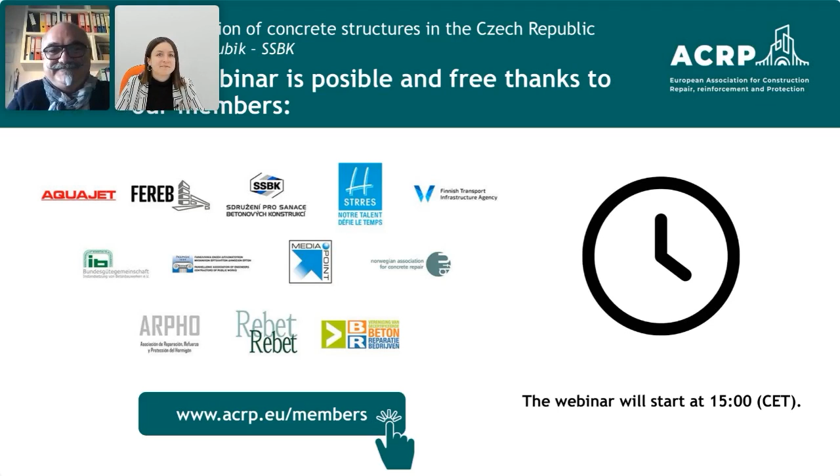Good afternoon to all members, to our participants, and welcome to our webinar. Let me introduce myself. My name is Ales Jakubik, and I am responsible for this online presentation. A little about me: I am the president of SSBK and the vice president of ACRP. I am the owner of a company engaged in research, development, and production of special materials.

I have been dealing with repairs of concrete structures for over 30 years. I work very closely with the Faculty of Civil Engineering of the Technical University in Brno and with other research institutes and companies in the Czech Republic.

Let me also introduce my colleagues who are speaking today on this webinar. One is my colleague Martin Luňáček, and the other is Ms. Karolina, Master of Science, who works as a research and development specialist at the Department of Material Engineering at the Faculty of Civil Engineering in Brno. She specializes in material solutions, repairs, and reinforcements for water management facilities.

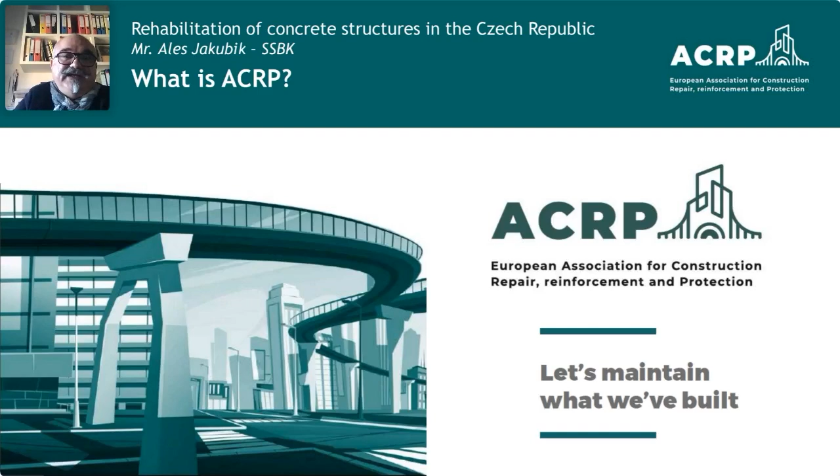The first slide is about our ACRP, the European Association for Construction Repair, Reinforcement and Protection. It's a European non-profit association founded in 2020. Our mission is to promote the maintenance of constructions and its applications in Europe towards the highest professional integrity and quality of service, repair, reinforcement, and protection techniques, and to promote the maintenance of structures and buildings. To achieve this mission, ACRP works to create a European network of professionals working together to develop and share best practices, regulations, and training.

The history: the initial idea was born in discussions between the French Association STRRES and the Spanish Association ARPHO in 2018. In March 2019, representatives of 6 European countries met in Paris to share experience and shape the initiative for a new European association. The European Association ACRP was founded in 2020.

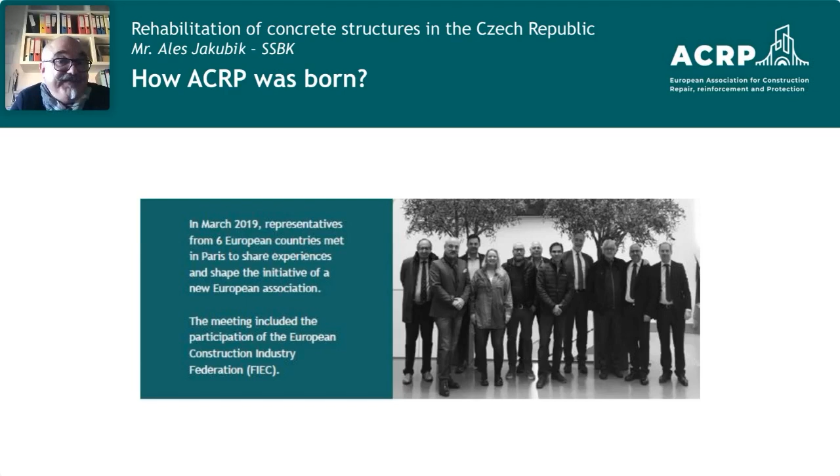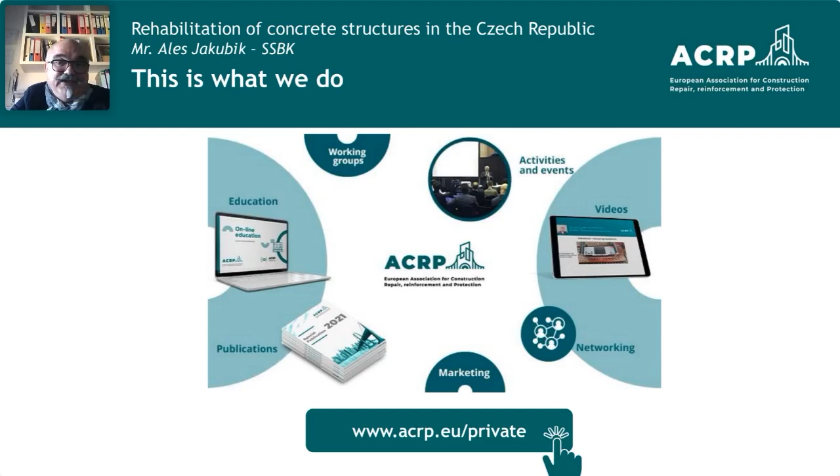ACRP currently brings together national associations across Europe. Our active members are colleagues from Belgium, Czech Republic, France, Finland, Germany, Greece, Italy, Norway, Spain, Sweden, and the Netherlands. ACRP is an open association, and we are constantly expanding our member base. We will be happy to welcome new members, so do not hesitate to contact us.

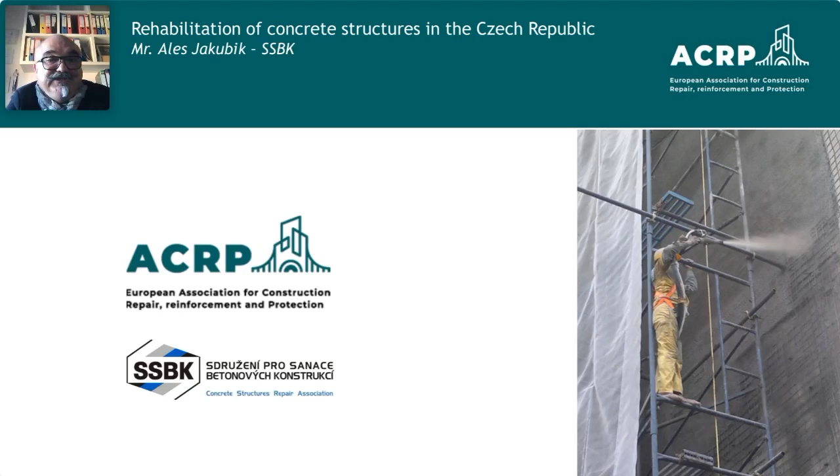Introduction to the webinar: one of our goals is to focus on educating and passing on the latest knowledge and experience. A set of webinars that we are constantly preparing for you is one of our important activities. Today, we have prepared another new webinar on the topic of technology of concrete repair, experience, and knowledge from the Czech Republic.

As Paul Stuem, our colleague from Norway, said, repairing the structure is not a problem, it is an integral part of the construction life cycle. I am applauding this statement. Each of us will proudly sign this definition.

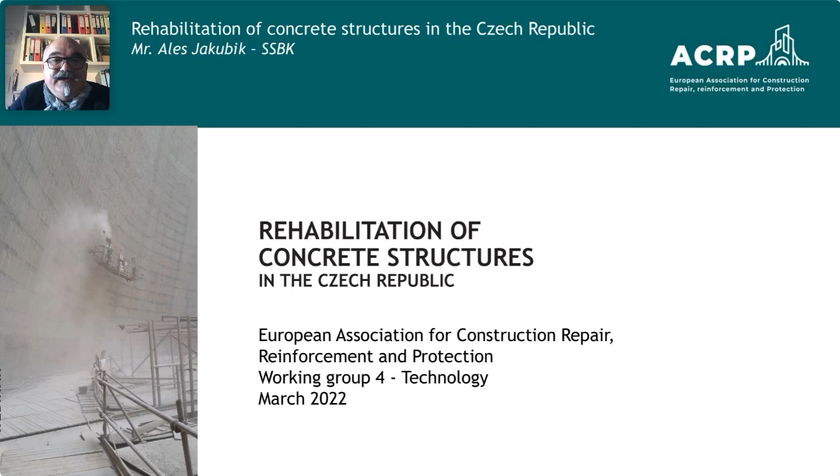The content of our webinar is divided into 5 parts. First is the introduction. The second is Working Group 4, technologies of the industry working group. The third is technical conditions for rehabilitation of concrete structures in the Czech Republic. Part 4 is examples and applications in selected implementations in the Czech Republic. And last, questions and comments from you, our participants.

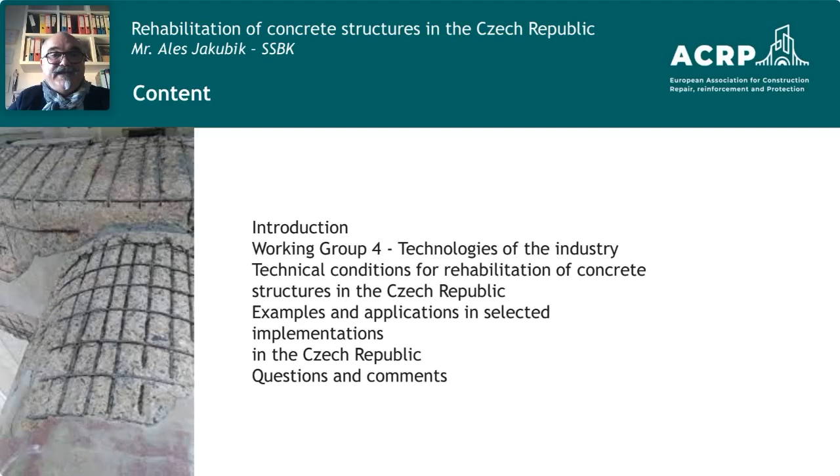Now let me talk about the abbreviation SSBK. It's one of the founding members of the ACRP. SSBK stands for the Czech name Association for Rehabilitation of Concrete Structures, and it was founded in 1992 in the Czech Republic.

SSBK deals with securing and protecting common interests in the field of rehabilitation of concrete structures. SSBK ensures the exchange of information, cooperates in areas of standardization, development of technical and technological solutions, professional advice, and professional education.

Close cooperation with many Czech technical universities. The 3 largest of them are permanent members of the SSBK. There is also close cooperation with a number of domestic associations and scientific companies.

Now about Working Group 4. The Working Group Technology deals with securing and protecting the common interests of ACRP members in the field of concrete structure repair and reinforcement technology, especially regarding technical information, development and plan creation, coordination in standardization, coordination in technical development, and coordination of consulting services. It prepares and shares experiences and knowledge among all ACRP members.

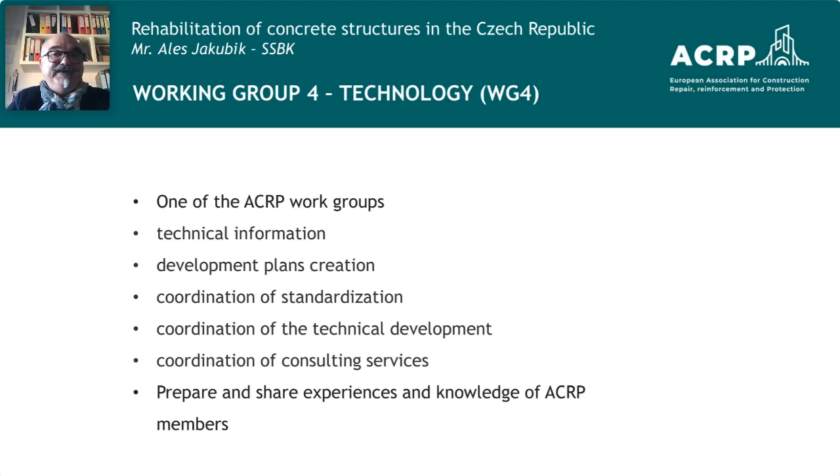Our goals are simple. The first goal we set for ourselves is the creation of a joint manual technology of concrete structure rehabilitation. We want to combine all current knowledge from the individual national associations to create one common, simple document.

This document should form a set of basic common rules which will follow the current European standards in the field of concrete structure rehabilitation.

Our work is based on the experience and governing documents of national associations. How can you join? Each member of the ACRP can participate in the work of this working group. Experts from all fields of remediation for concrete structures are welcome, such as designers, diagnostic specialists, technological and material engineers, or specialists in the execution and control of work.

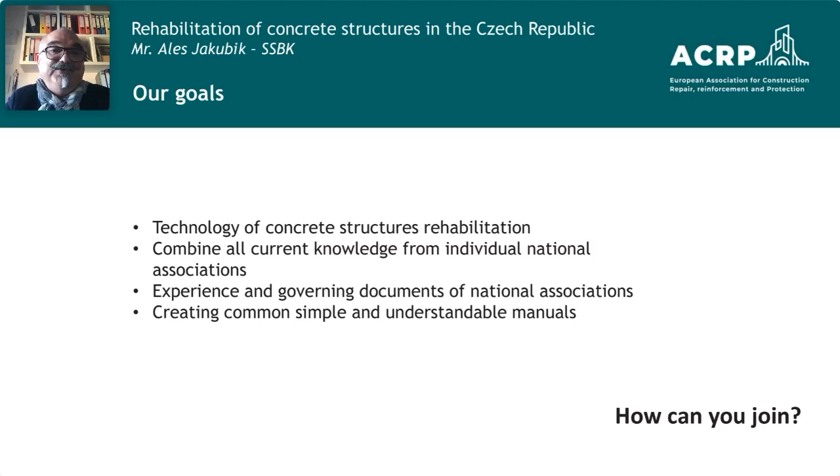The working group works closely with academics at universities and research institutes. Being part of this group also means promoting discussion and collective work on basic guidelines related to standardization and recommendations for the future development of these activities.

Now we move to the topic of this webinar: repair of concrete structures in Czech Republic. Our procedures, our technology steps, our manuals.

The webinar is focused on the area of concrete structure rehabilitation, especially the part that deals with design, technology, material solution, and implementation of this method of building maintenance. We will draw on our own experience and cooperation within the working group.

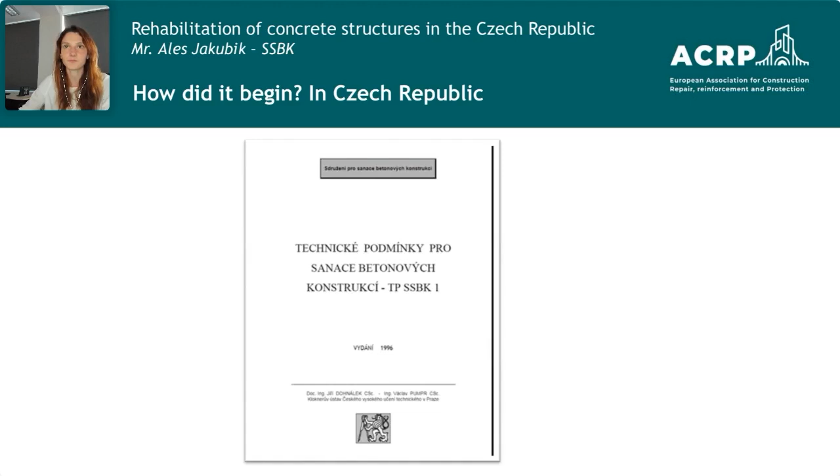It predates the EN 1504 standards; the handbook drew on national standards which it supplemented and expanded. The first edition defined initial recommendations and values like methods of diagnostics, use of tests, methods of evaluation, technological procedures, and recommendations. The basic document had only 60 pages.

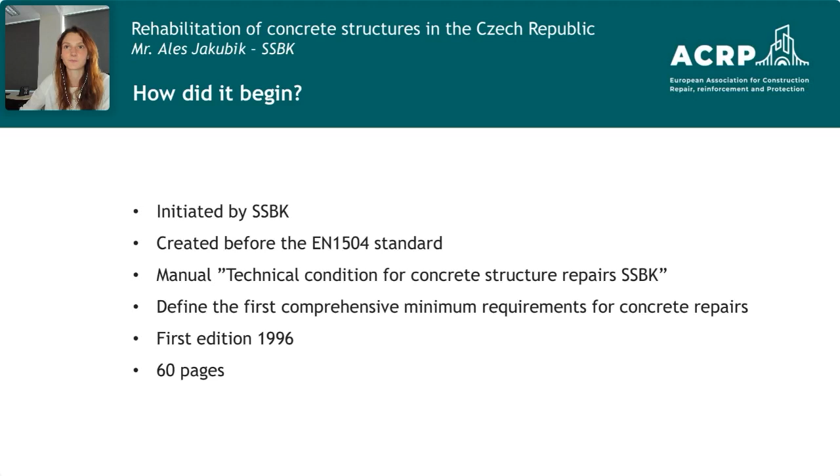This first edition is focused mainly on two areas. First is execution and control of works, and the second is about testing procedures.

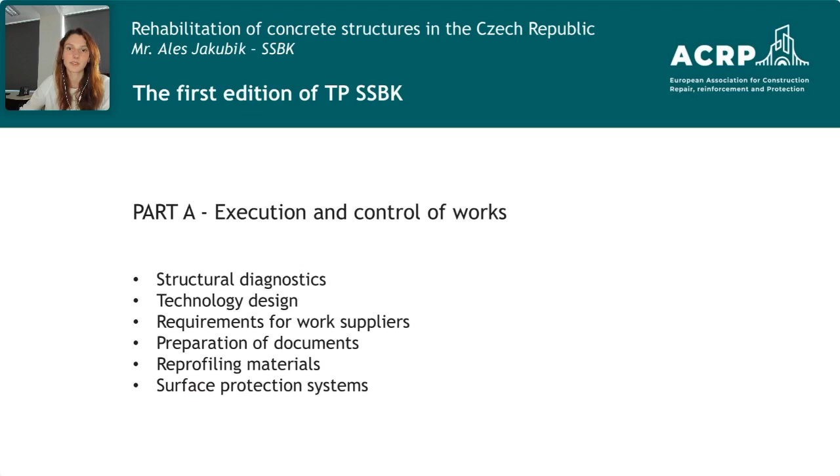In the first area, we find chapters like structure diagnostics, technology design, requirements for work suppliers, preparation of documents, reprofiling materials, and surface protection systems. In the second part, we deal with sampling and storage, sample preparation and control, and the test procedures themselves, including evaluation.

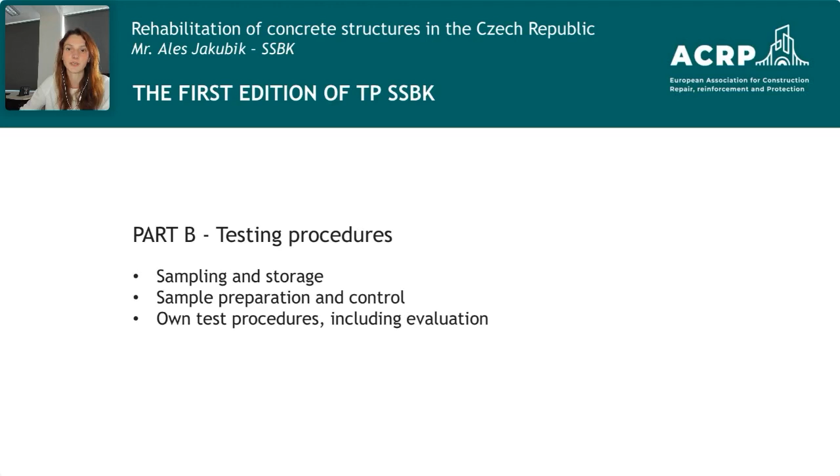This brings me to a question: how was this document implemented? The document has become a basic manual for designers, providing them with a guide for the design of the object.

For contractors, it defines technological and control procedures; for suppliers of materials and technology, it sets requirements; for investors and technical supervisors, it provides instruction on how to control the progress of the work; and for the academic community, it provides a basic summary.

Now, the technical conditions of TP SSBK have undergone a number of revisions. The authors' team involved important experts from the academic environment and practice. With the creation of the European standard EN 1504, this standard was gradually fully implemented.

Today we use an updated edition called TP SSBK 3. The document has expanded to more than 260 pages. A number of new chapters have been added, and we have refined a number of parameters and recommendations. We follow the latest standards.

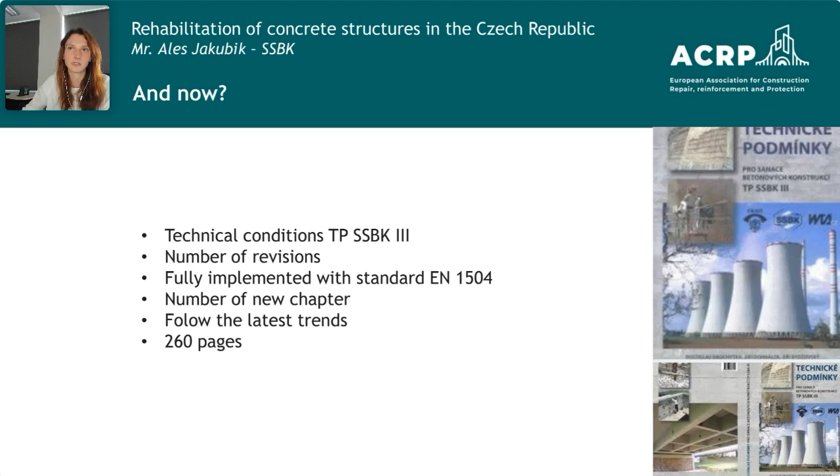I would like to thank Professor Rostislav Drochytka from Brno University, leader of the authors' team. In the last issue, the following areas are addressed: construction and management, assessment and diagnostic process, general design, repair and protection design, implementation of repair and protection, handover and acceptance of the work, occupational safety, fire protection, hygiene and environmental protection.

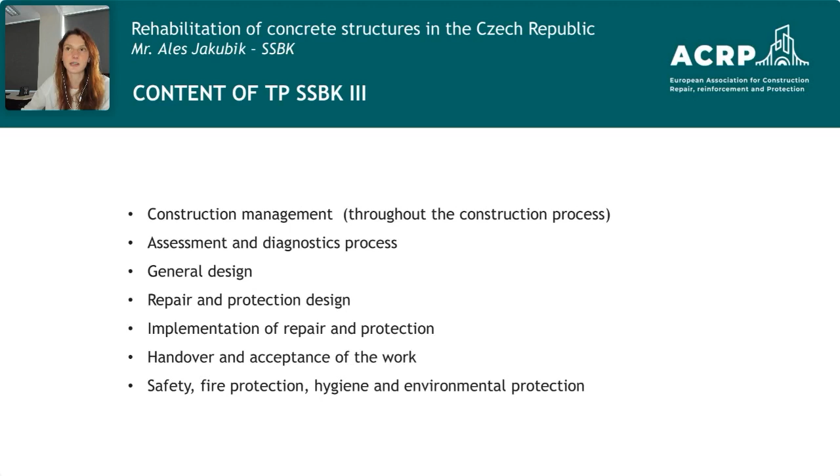But what is most important? We still managed to preserve the original goals: to provide anyone who wants to professionally work in this area a clear manual which they can use to properly plan, carry out, and check the rehabilitation of concrete structures.

We now set the same goal in Working Group 4 of the European ACRP Association. Our goal is to compile a basic, simple manual in which we reflect the experience and specific criteria from individual member countries.

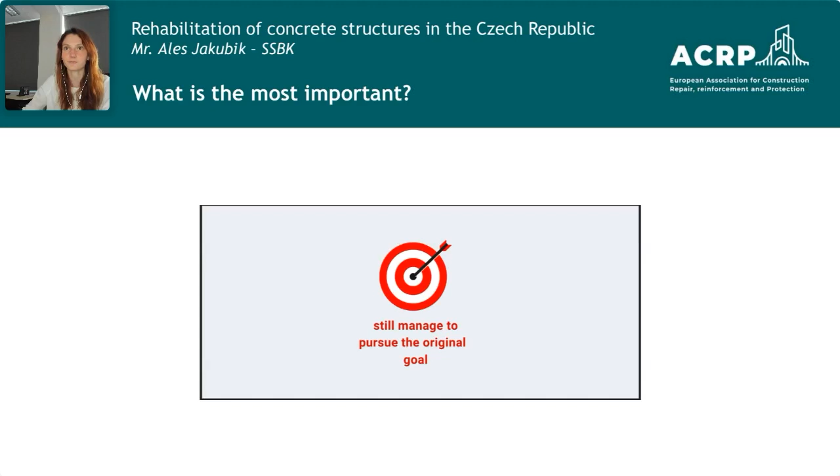First, gather the available data; design research; diagnostics of materials; and evaluation of results. Following these steps, the technical research proceeds.

First, collect maximum construction data. Carefully study the available project documentation. Consider all the loads that will act on the structure now. Diagnose the material you will be repairing.

This part can be divided into on-site tests and laboratory tests. In every part, you should perform physical and chemical tests. Carry out a thorough inspection of all faults on-site. Evaluate the results. Only now do you have enough information to design the right course of action.

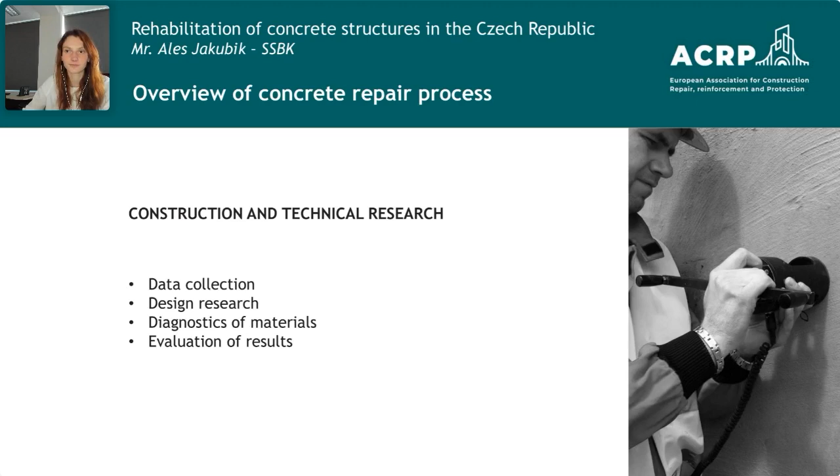The rehabilitation process itself relies on proven procedures: design procedures for repair and protection of the structure, choose a suitable repair technology, and consider the possibility of implementation.

Pay maximum attention to the surface preparation phase. The repair will only be as good as the surface preparation. Plan the implementation process, including determination of checkpoints, check the progress of the repair, and insist on following all procedures.

Test according to the recommended process and document the procedure truly. Prepare the finished works for delivery to the customer, and compile a suitable plan for maintenance and operation of the structure after the repair. The last point is: do not forget about safety and environmental protection during the whole process.

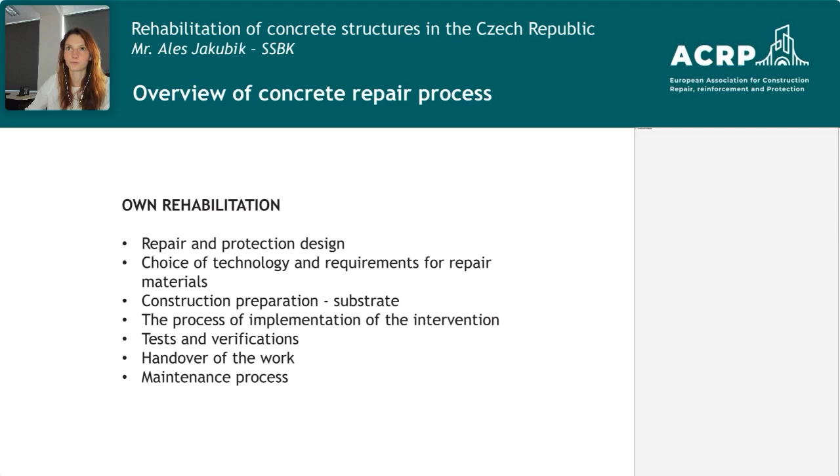The advantage of the TP SSBK 3 manual is the breadth of its use. Anyone who wants to deal with concrete repairs professionally will find a clear, simple guide here in one place, in a single document. For example, you will find diagnostic methods suitable for use, description of technology procedures, requirements for materials and technologies, selection of appropriate procedures, performing control tests, determination of recommended values, and method of process documentation.

Please don't forget once again, the whole process of repairing a concrete structure is complete only by handing over the work, including detailed documentation and verification tests, including the design of a suitable maintenance plan for the structure after the repair. Our goal is to extend the life of the structure, adapt it to the current load conditions, and be effective compared to its demolition and new construction.

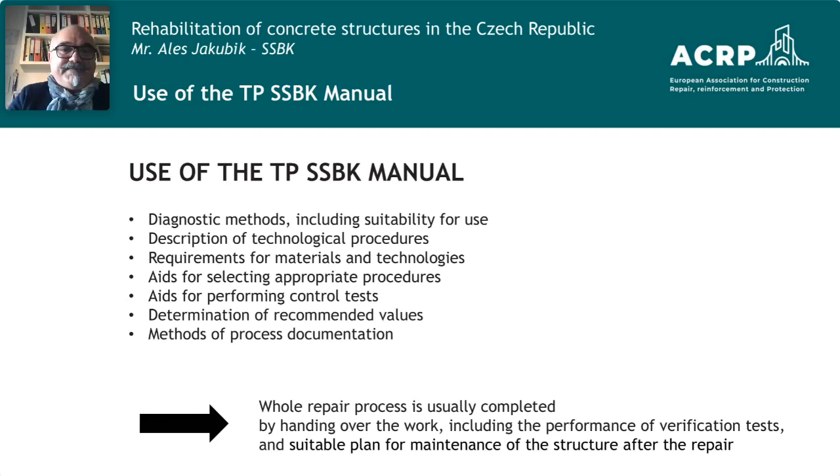Hello members, I'm back, and we now talk about our experience from practice of repairs of concrete structures in the Czech Republic. The theory is sometimes a little too academic.

I don't want to use the word boring - this doesn't diminish its importance. So let's take a little practice now. On several slides, we will present some examples that we have encountered over the last 30 years of remediation of concrete structures.

The defects, errors, damage - in other words, an opportunity for our work. Examples of completed construction and repair processes, repair interventions in the Czech Republic. The next photos were obtained with the kind permission of our SSBK members.

The first construction, which is very small, is a cubist construction of a cemetery wall with a high degree of damage. It suffered from neglected maintenance, but is an architecturally interesting construction.

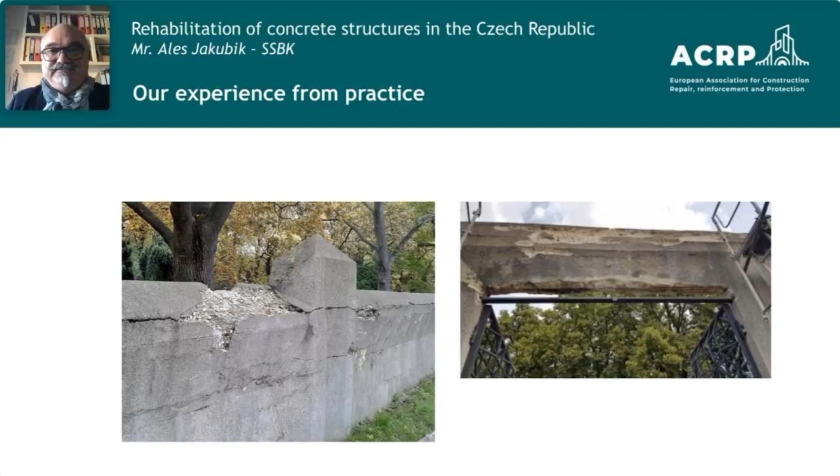The next slide shows the construction work by repair works. At first glance, a simple construction, but it's 1,100 running meters of concrete construction. It's a very complicated shape of the wall, a series of geometric surfaces with a 3D effect. The head of the wall is very broken.

It is solved by concreting into individual formwork. Each part of this formwork was original, with technology for opening and closing, and a point for concreting.

In the next picture, additional reinforcement is required. It was done with stainless steel stitching and hard injection with polymers, and thorough preparation of the substrate.

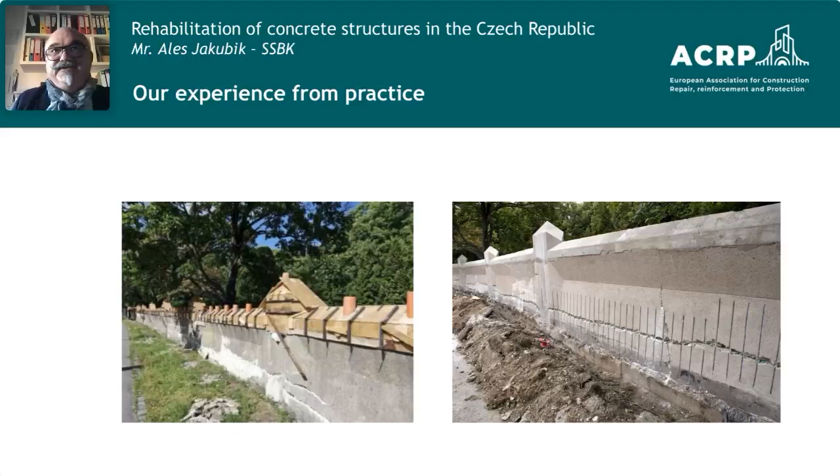In the next slide, you see manual reprofiling with special mortars, with special individual materials for color, structure, and properties suited to this construction, which was solved with experts in monument care. The resulting repair restored the historic structure to its original phase.

This simple construction was an award-winning project, implemented by SOSTA, one of the members of SSBK.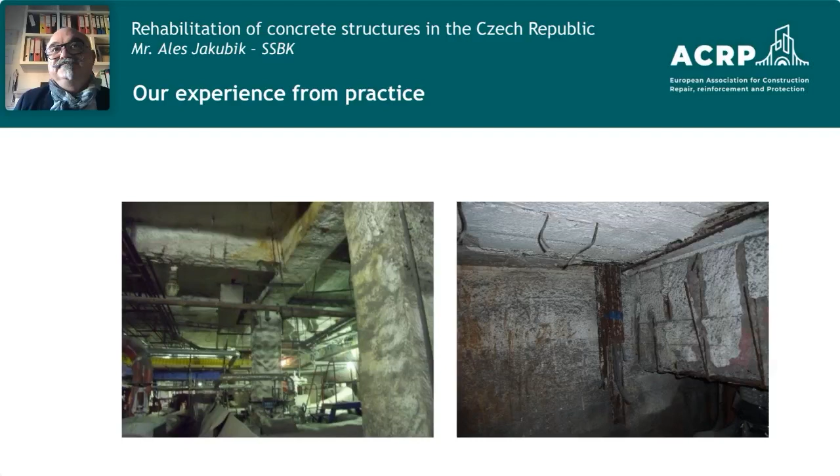The idea of the repair works was necessary reinforcement of the ceiling structure, induced by a technology change. New technology was planned in this heating plant, and during this process new reinforcement was designed, which increased the load capacity of this construction.

Then came repair of damaged parts, and on the right picture you see the ready structure for application of remediation materials with special mortars.

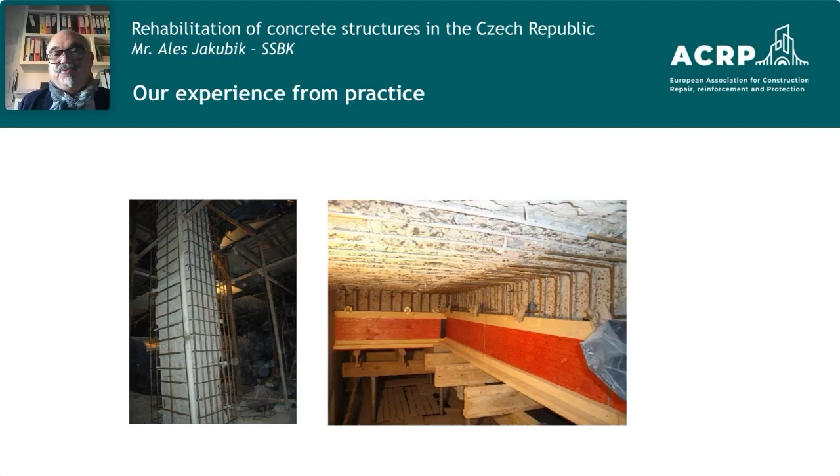On the next slide you see the finalizing work, the final result after the repair - reinforced and repaired construction of the beams and slabs with protective layers and coatings. This operation extended the service life of this technological building.

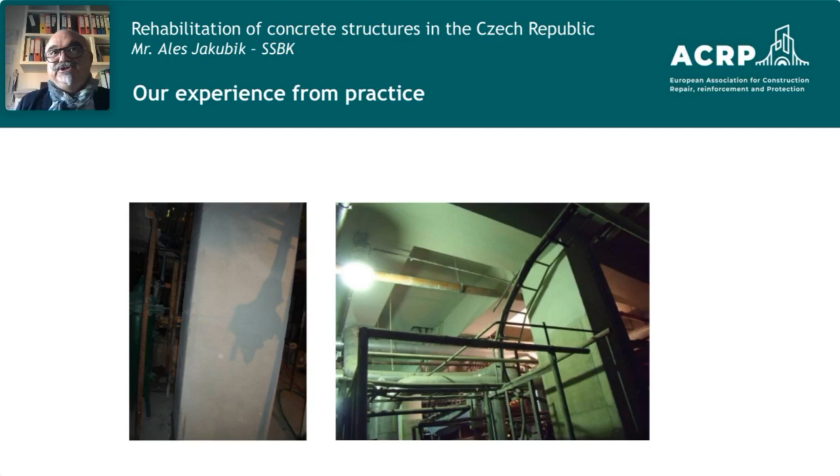On the next slide, you see our experience in the water industry. On the left side is remediation of a storage water tank, which had damage to the ceiling structure. This part of construction has a very high humidity load with air excess. It needed reinforcement of the structure, caused by a change in technology too.

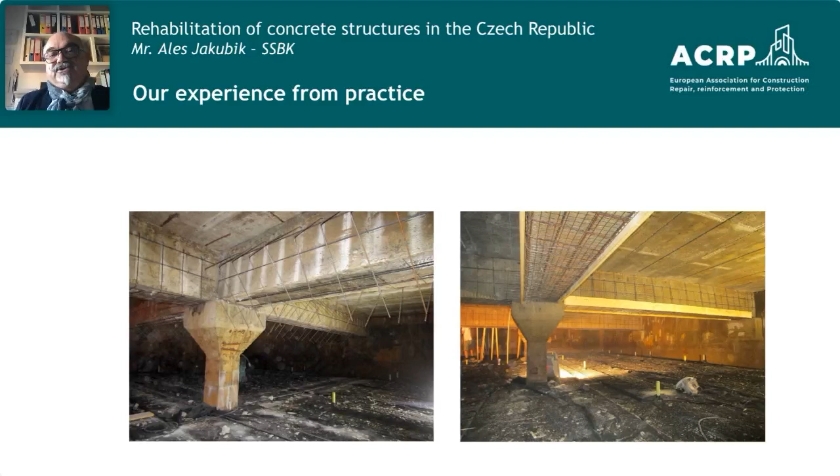The new technology in this water plant is going in, and we need to reinforce the construction and repair part of this water tank. And now you see the final result.

The construction is ready. On the left picture is the construction ready for final coatings, and on the right picture is the finalized repair works.

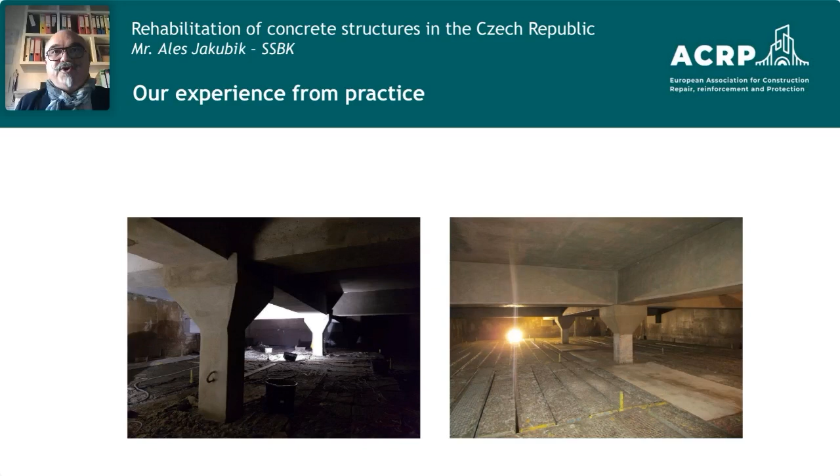In the next slide, you see the road bridge with beam degradation. You see it on the left side, the problems. You see the color parts, which show the reinforcement.

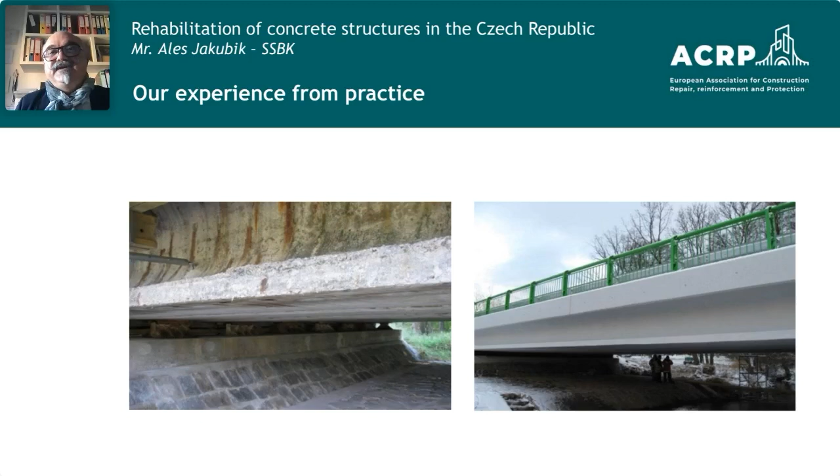The next part, or next slide, is our experience from sewerage facilities. This type is especially underground construction with a complicated approach. The implementation and realization of this work was in the historic city center, and this construction is 50 years old.

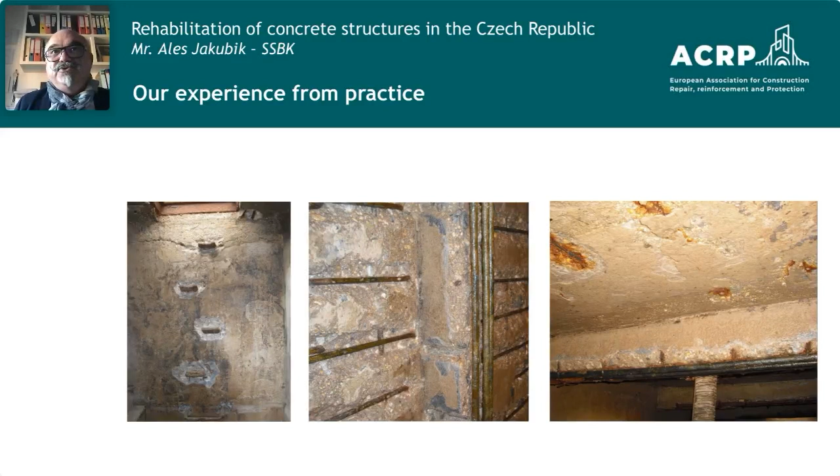The problem in this type is high humidity load and load of the sewerage environment. This comes with high risk of biocorrosion. This biocorrosion opens the construction and makes big damage to the concrete structure.

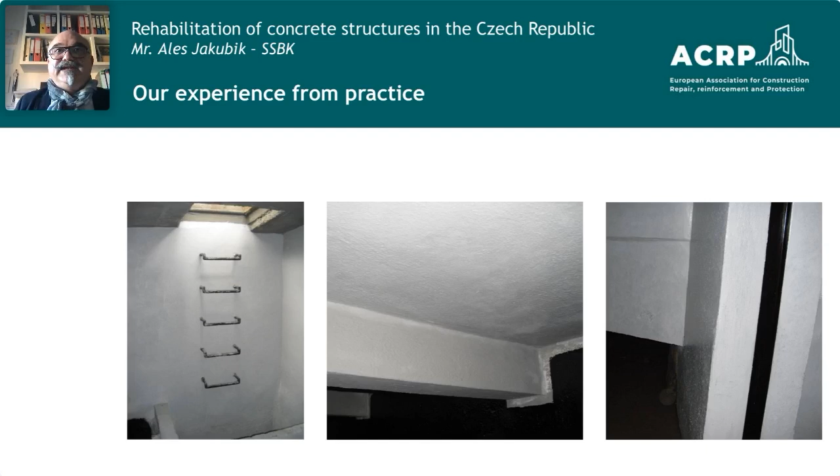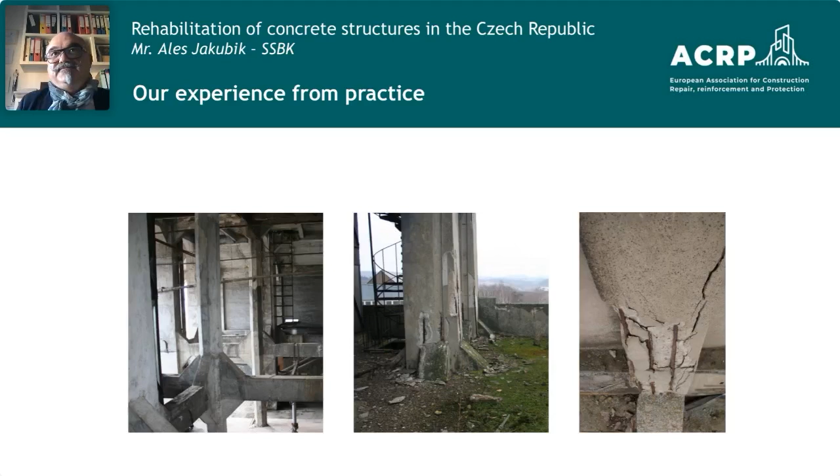You see the construction of our wall with a big problem, and now this is the final result after repair work - the condition after complete repair. The additional reinforcement is incorporated into the original construction.

Again, solved with experts in monument care. It's an architecturally sensitive solution. It preserved the historical character of the building and brings a new, nice industrial design.

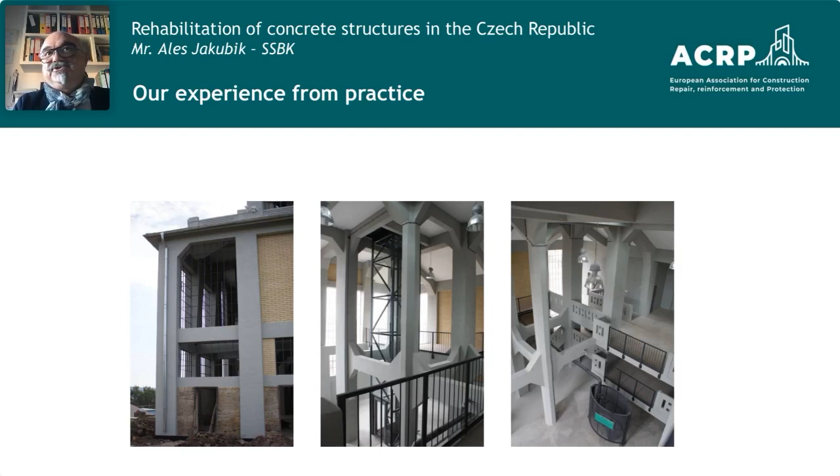The next slide is our experience with restoration of an industrial building. It's a ceiling ribbed slab, or ribbed board. The rehabilitation of the concrete structure and reinforcement of the structure. The restoration is a requirement to increase the load-bearing capacity.

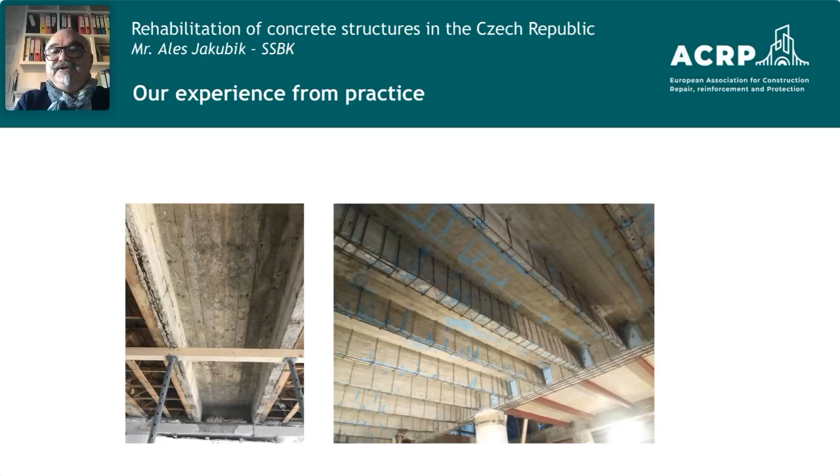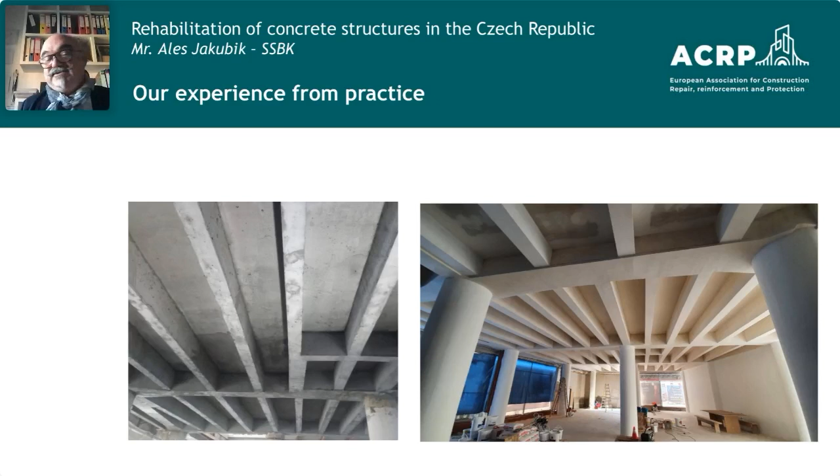And now the finalizing work - final condition after repair. Industrial solution with an architectural feel, ready for new use, and for me, a beautiful concrete structure.

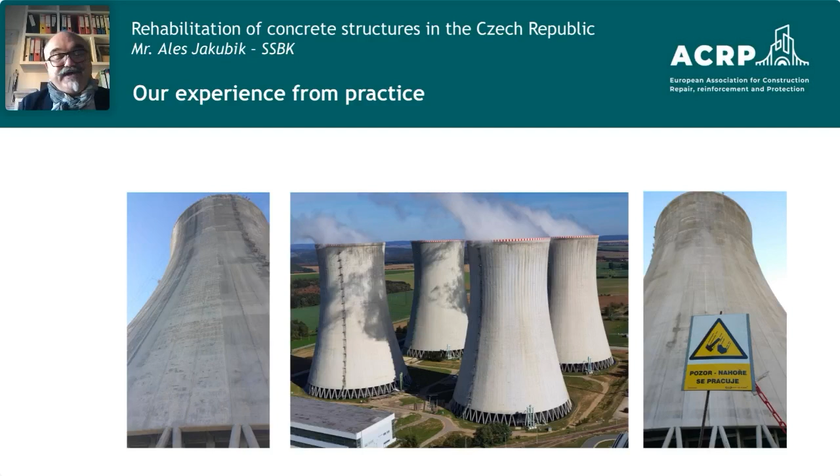We are coming to the biggest structure we repair. We are now in the energy industry, in the rehabilitation of cooling towers. The problems are with the loads, atmospheric loads and operating loads. And the problem for realization, diagnostic or repair work is working at great heights.

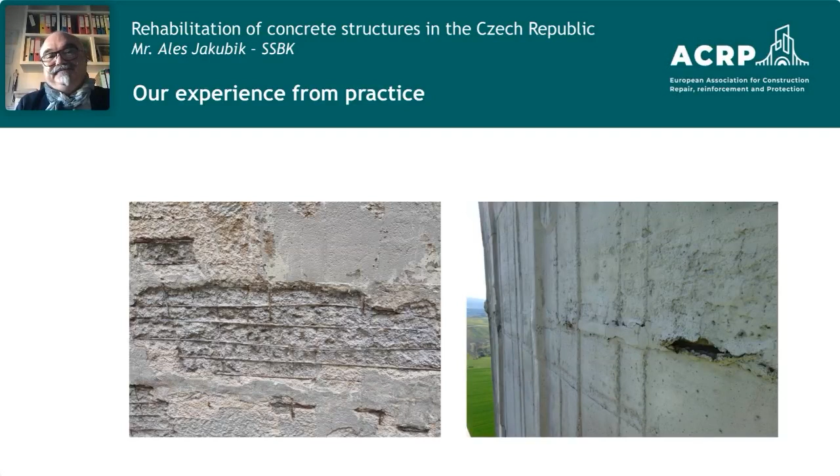It's a typical fault in cooling towers - reinforcement revealed, faults caused by corrosion on reinforcement, small covering layers of concrete, and original material with lower E modulus, the corrosion of concrete.

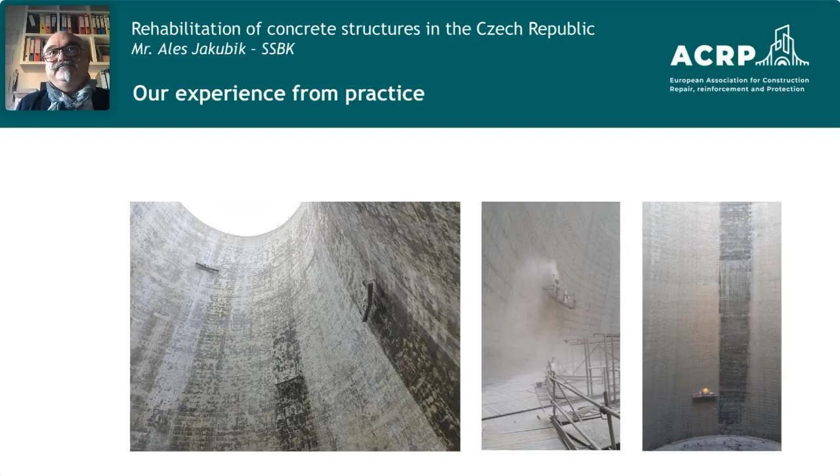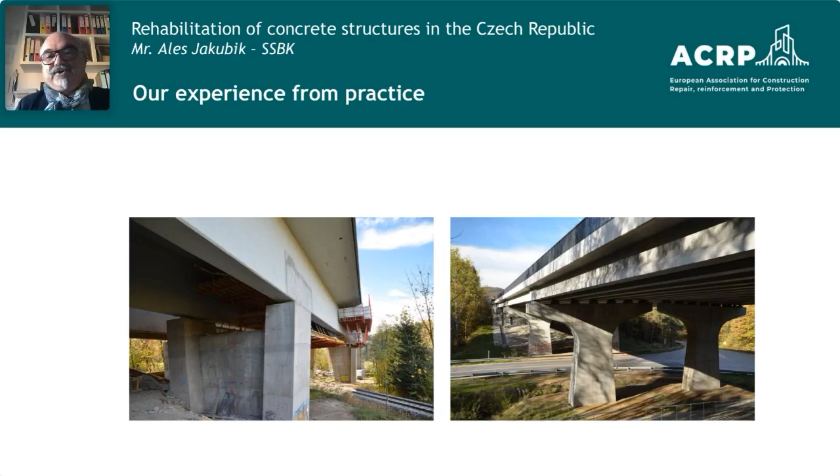The next construction is a highway bridge. It's from my partner, from Martin. D1 motorway rehabilitation and reinforcement of the bridge deck. It is work from suspended footbridges.

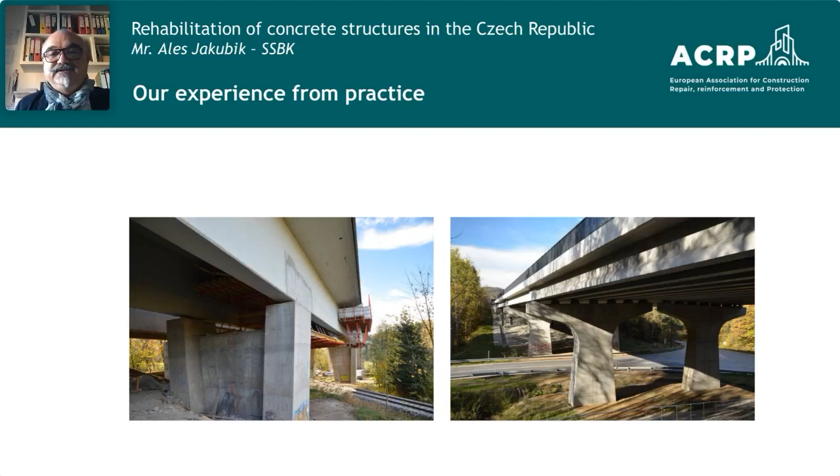On the left picture, the repair work. On the right picture, after the repair works. And the last sample I will show is the largest bridge in Prague, rehabilitation and reinforcement of the bridge deck.

Load with traffic and underground train with static and dynamic loads. The underground is going into the bridge. And the work is from a suspended footbridge, new drainage solution, and the bridge is over 40 meters high.